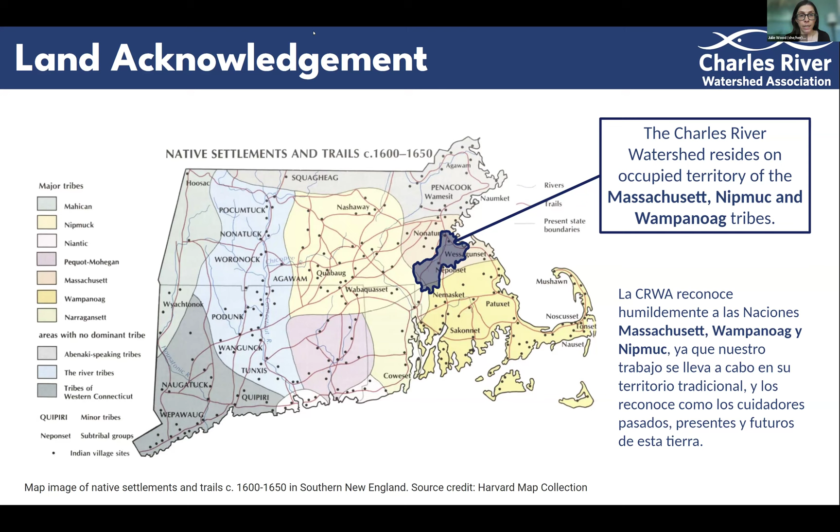A little background on the initiative we're going to talk about tonight. Starting back in 2021, working as a team with Weston and Sampson, Communities Responding to Extreme Weather, and the Charles River Climate Compact, which is a voluntary partnership of cities and towns in the watershed, we all got together and obtained funding from the state's Municipal Vulnerability Preparedness Program to develop what we call the Charles River Flood Model, or CRFM for short.

This is a computer model that simulates how water moves across the watershed. We can use this computer model to show the impacts of various storm events, so we can look at present day storm events and future storm events and see where it's going to flood and how deep that flooding will be.

We use that model not only to understand the impacts of future flooding, but also to understand possible solutions. That's where we're going to spend our time tonight.

There are 3 different areas that I already previewed in the agenda: this impact area along the main stem of the Charles between Dedham and Boston, the Barnes Memorial Park in Dedham, and an area around Adler Brook and the Needham Public Works building in Needham. Two of these are single sites, or slightly larger than single sites, essentially one site, whereas one is a larger area.

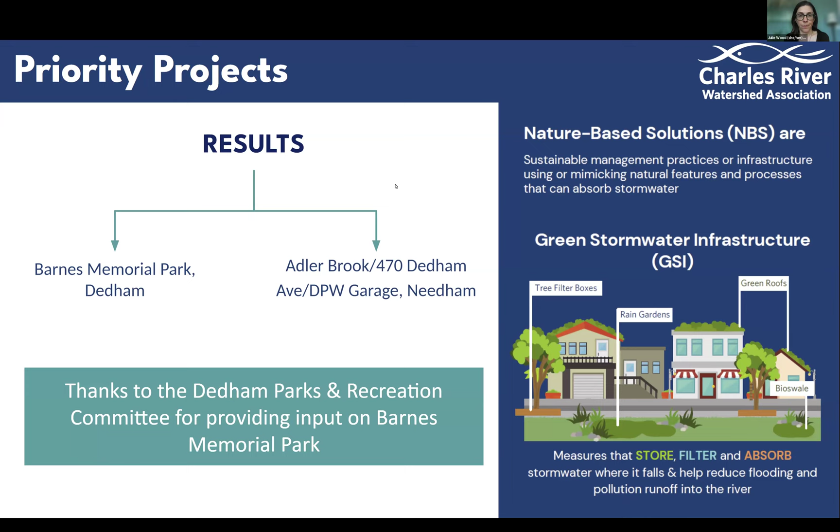You may have noticed one of the sites was a lot bigger. These are what we call our impact areas - essentially mini drainage basins, mini watersheds. The model divides the full study area up into 300 little pieces of drainage, so 300 catchments.

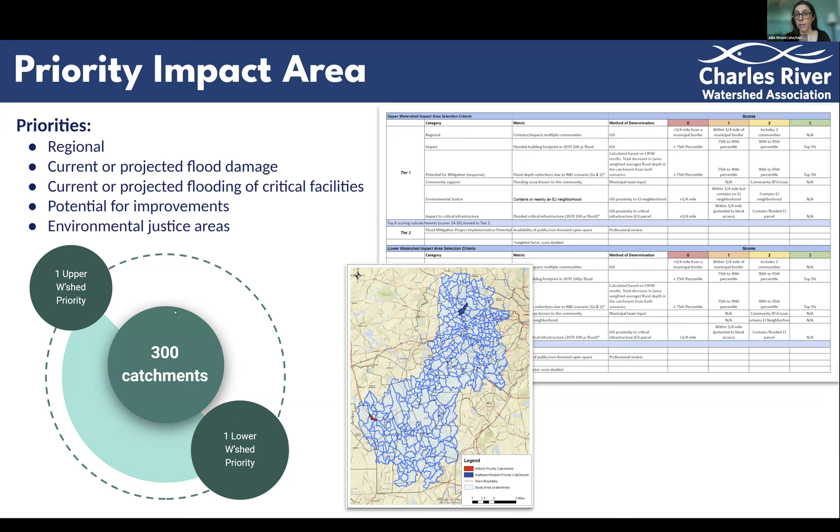The slide shows what we're looking for in prioritizing those. For these, we are looking for ones that might have cross-jurisdictional impact - maybe it includes 2 cities, 2 towns, like the one we're talking about tonight. Maybe it's right on the border and can prevent some downstream flooding. Is there current flood damage in the area? Is there projected or current flooding of critical facilities in the area? Is there potential for flood improvements, just like we're looking for with the site designs? And are there environmental justice areas that we can look to potentially invest some public investment in protecting?

All right, so that's the background. Tonight, we're going to present you for each of these sites with some concept design. That might be a very familiar term to some of you; it may be a new term to others. What is a concept design? It's an idea.

A design that gives you the general idea of what might be constructed there. It's not an engineering design with all the details of how deep something needs to be or what materials are needed. It's a very general idea of what would and could happen at a site.

It's a great time to get feedback because it's enough information to solicit input, and not far enough along that you can't take in a lot of feedback and a lot of changes.

So what do concept designs take into account? They take into account the project's goals, basic site information, and community needs and desires, which we'd want to hear from you tonight. What do they not consider?

No precise technical details of the site. We have not done soil tests, surveys, elevation surveys, precise system designs, potential ADA requirements, full coordination with all city and town departments, or maintenance needs and plans. None of those have been done at this point. That would happen in a further stage.

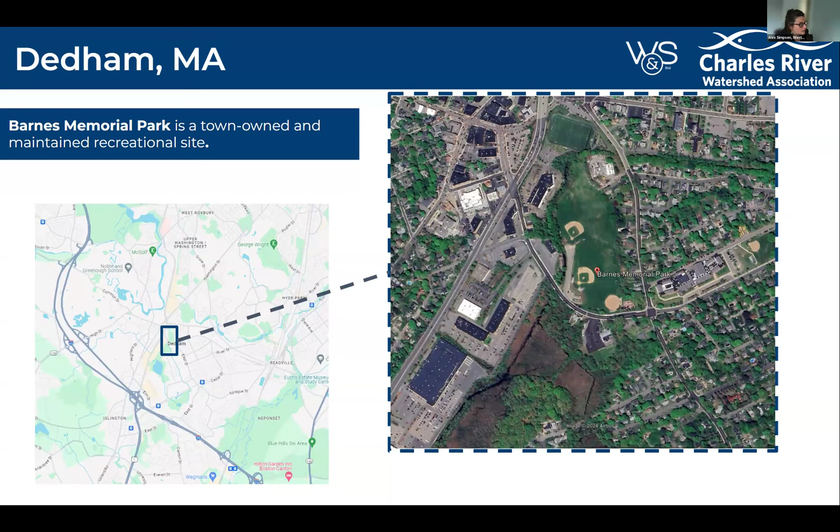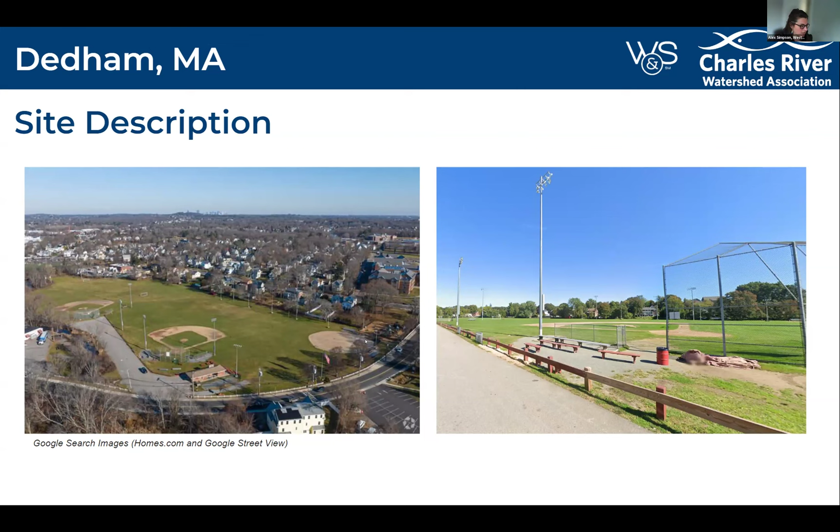As a site description, this is a well-loved, well-used recreational park site. We have an informal parking lot without any parking lines where people can go in and access the site. We have 2 formal playing fields, green space up on the north, another field back here, and a playground—a very well-loved park with lots of people using it—and then we have the concession stand here.

Now that we have the context of the site, we're going to go through the different concepts we looked at to reduce some of that anticipated flooding. These are the green infrastructure solutions Julie touched on earlier. I'll start by walking through everything we're looking at, and then as we go through the presentation we'll talk through the specific numbered concepts. I just want to touch on everything first, then go through each one, and at the end if we have questions we can talk about that. Feel free to raise your hand and pop in if you have a question—I'm happy to explain anything as we go along.

So first up, this is the site—here's our street, this is our water body, and here's the parking lot. We're looking at expanding the parking, which would be an impervious solution, but how can we treat that impervious area? We're looking at a bioretention basin, stream overflow storage, wetland restoration up here, renaturalization, and increasing the tree canopy, which is very important for urban heat island effect—we're doing that in multiple places across the site.

As Julie said, these aren't final placements, so if you want more trees, don't worry, we'd definitely be looking at that. We're also looking at an access path to increase circulation through the park and allow people to access parts of the park that aren't currently accessible to them. Finally, we're looking at a bioretention basin or a demonstration pollinator garden down at the south near the additional parking on the road.

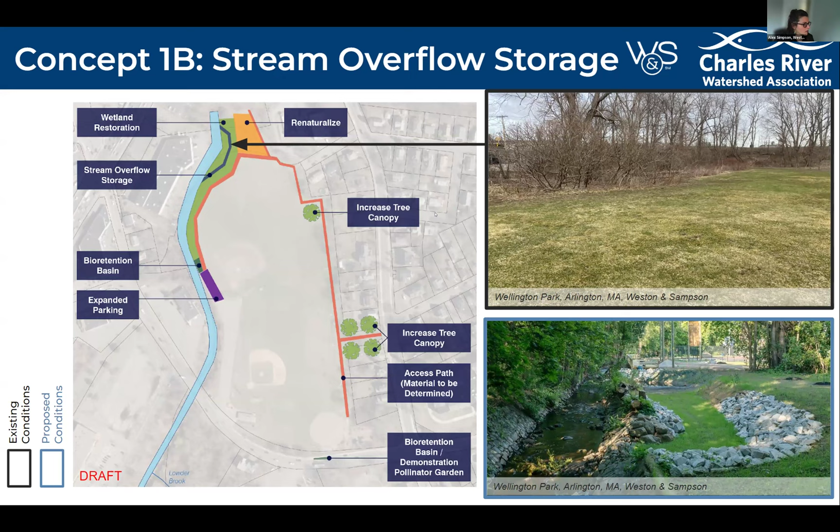For concept 2, we're looking at renaturalizing the space. In the northern part of the park, we have this wide open swath right here, and currently it's used as an access path from a higher point in the town. But other than that, this is kind of an unprescribed space that is currently not being maximized.

So it's not just trees - we're adding different topography features, increasing the amount of storage, different options there. There's just a lot of different surface treatments that can be done in a renaturalization scenario. Programming this area to be more effective at mitigating the anticipated flooding is what we're looking at doing here, without affecting the current recreational space.

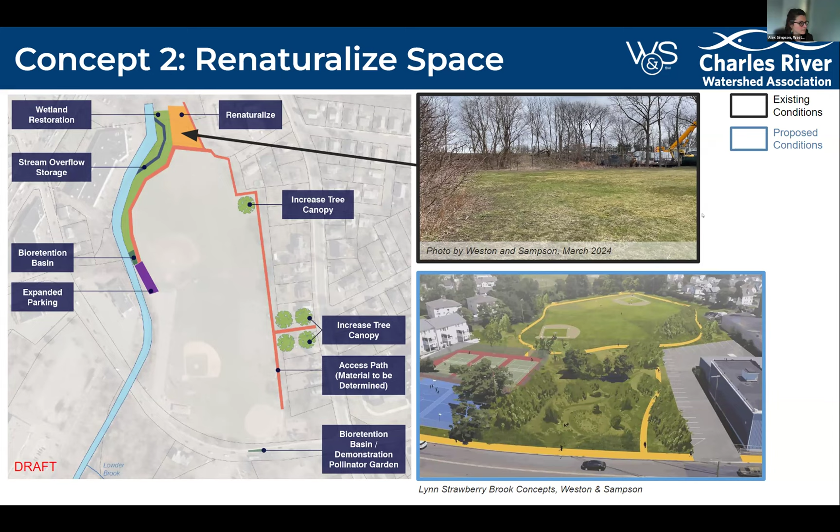Concept 3 would be looking at the bump out. This is at the southern point of the site. Right now, this is existing conditions - we have a catch basin. It's kind of at the low point of the road, and then it bumps out here, and there's room between here and an existing utility pole.

That would be a great opportunity to remove some of that impervious pavement and actually give it a pervious treatment, which a bioretention bump out could do, to capture that stormwater and infiltrate it into the ground, and add additional habitat by adding plantings with additional water uptake. So you can have a beautiful garden right next to your roadway while also increasing the amount of stormwater storage available - that's what we would like to do here.

Concept 4 is expanding the parking. We've been talking about these different pervious solutions, and this isn't a solution, but this is something that will improve the accessibility and use of the park. That's something we don't want to discount, and it's something we want to look into.

But you do have the opportunity, when you're looking at increasing the impervious area of a site, to mitigate it and actually leave it better than you started with. One way to do that is with a rain garden or different mitigation strategies that collect that stormwater you're additionally generating, infiltrating it and reducing the amount that goes back into the system.

In the existing parking lot, they already have a system that is working great and that the town really likes. So we'd be looking at replicating that system further down based on the increase, to try to even reduce the amount of runoff coming off the existing pavement as well.

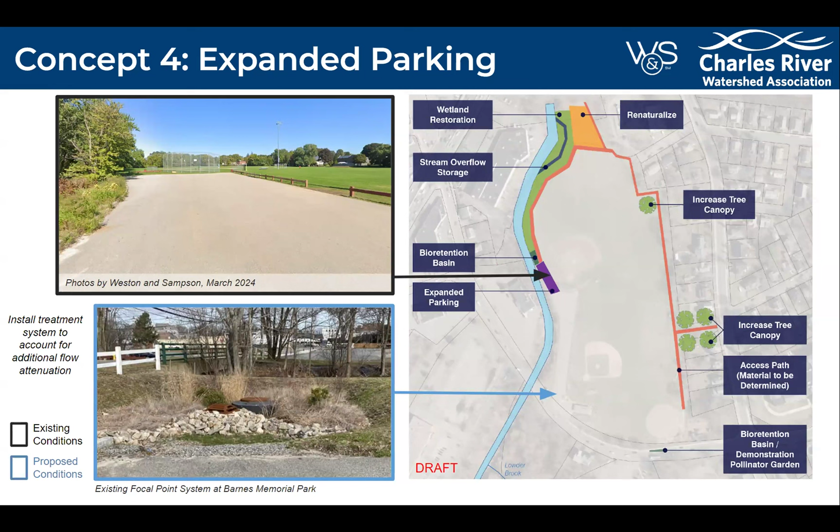As you were showing the image of the flood model, it looked like there was quite a bit of flooding anticipated south of the fields in the neighborhood area. So I was wondering if the design is incorporating or aiming to infiltrate some of that flooding through the channel restoration, or if that's a different project entirely.

As part of this specific project, we're looking at just the impacts on the field, but those downstream impacts are typically inherent to any type of project. Further modeling would be required to see what the actual impact would be. But typically...

Every water goes everywhere. Jenny, you look like you want to add something. Yeah, I was going to say, Allie, that upstream area is actually sort of a wetland system. It does encroach into the neighborhoods, but if you look at it in aerials, there is quite a bit of natural area there.

We did look at whether we could expand this project north. Unfortunately, there's really no large municipally owned parcels. It's a lot of commercial area abutting it, so it's really a separate project from our perspective. There's also culvert considerations that would need to be a piece of the puzzle under Eastern Ave. So that's the answer we have.

Okay, thank you. That's very helpful. Yeah, and just to add on, we did look over here, and this is all private, so that kind of limits some of what we can look at. Yes, Frank?

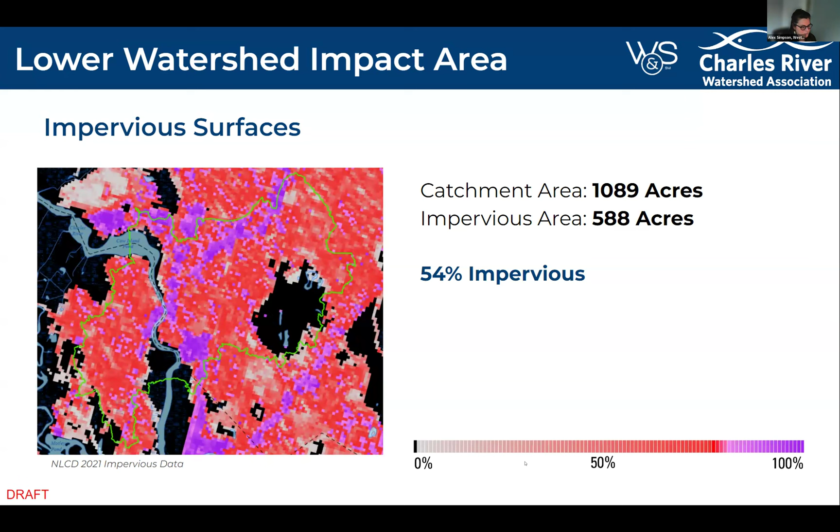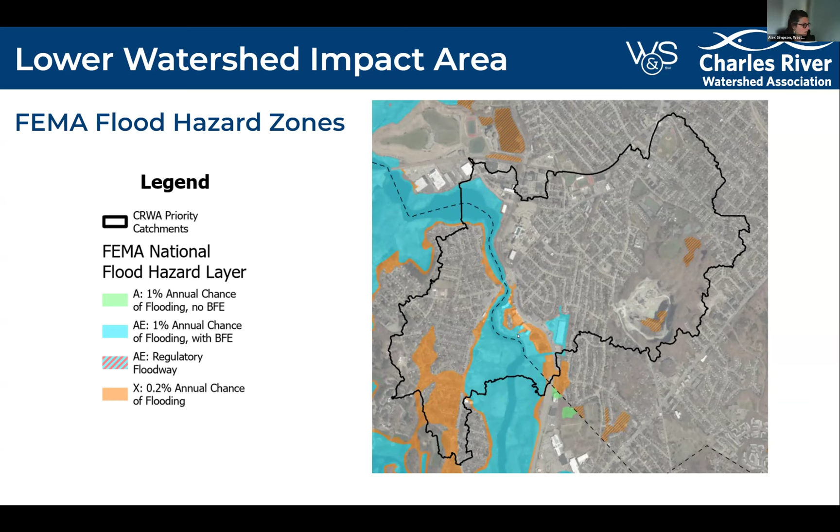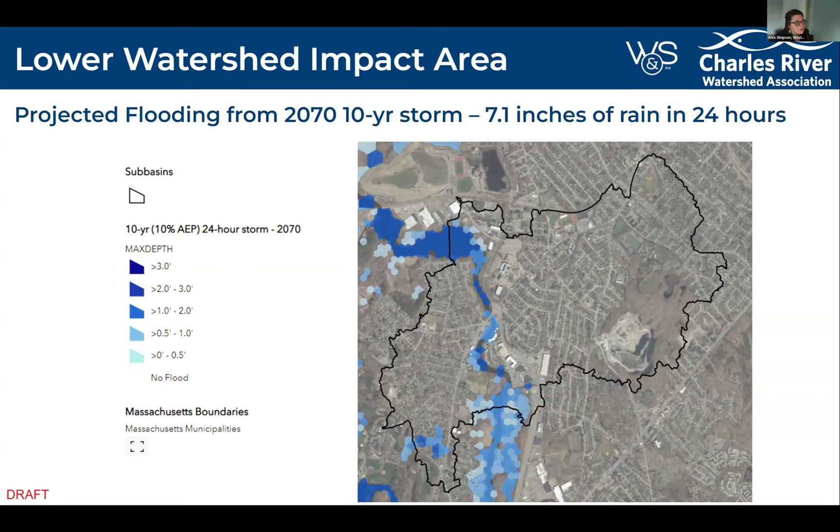As we talked about before with the modeling we've been doing, the projected flooding from the 2070 10-year storm is approximately 7.1 inches of rain in a 24-hour period, which is a lot of rain. We just talked about how over half of the area in this catchment is impervious, so it's not going into the ground in over half of this catchment. Looking at these different polygons with the depths, you can see it's pretty deep up here, and as we go this way it's not as bad down here, but we still are looking at increased flooding during this 2070 10-year storm event.

I wanted to note to everyone, this is not the most amount of flood mitigation you could do in this subcatchment. We focus on the largest opportunities and the best bang for your buck. There's a lot of residential neighborhoods with roadways, which can be very challenging to install meaningful amounts of flood storage due to limitations with utilities, parking, etc. So this isn't everything you could do, but this is a pass where we're looking at the best and biggest options to put some context to the scale of this.

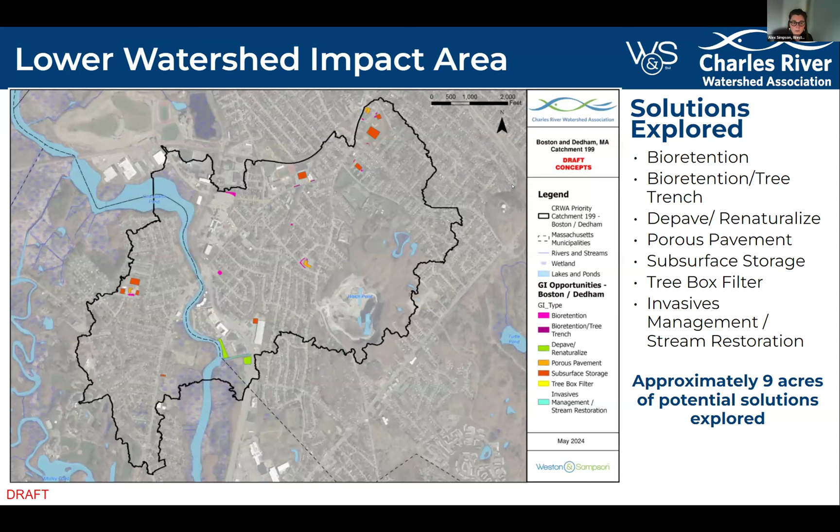Yeah, no, that's great, Jenny, so thank you for bringing that up. You can do green infrastructure almost anywhere, and if you're looking locally there are other opportunities, but like Jenny said, we're looking at these bigger opportunities to have bigger impact. So don't worry, if you don't see something you think would be great here, it doesn't mean it isn't an option.

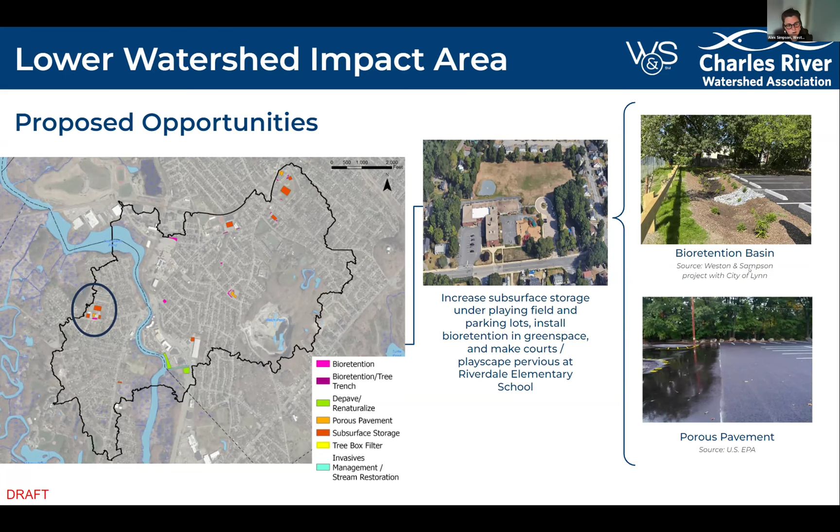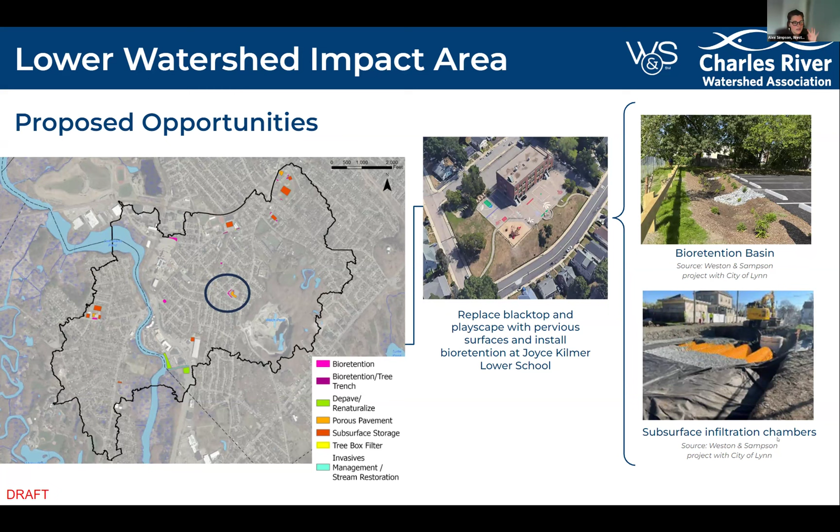And same with subsurface infiltration chambers - doing the subsurface system, you have less opportunity for educational engagement. But as Jenny said, the quantity of water that can be captured in these systems shouldn't be understated. So having a nice balance of surface treatments that students can see and be educated on, while also having these subsurface systems that can take in large swaths of water, is a really nice co-benefit to have both on a site where possible.

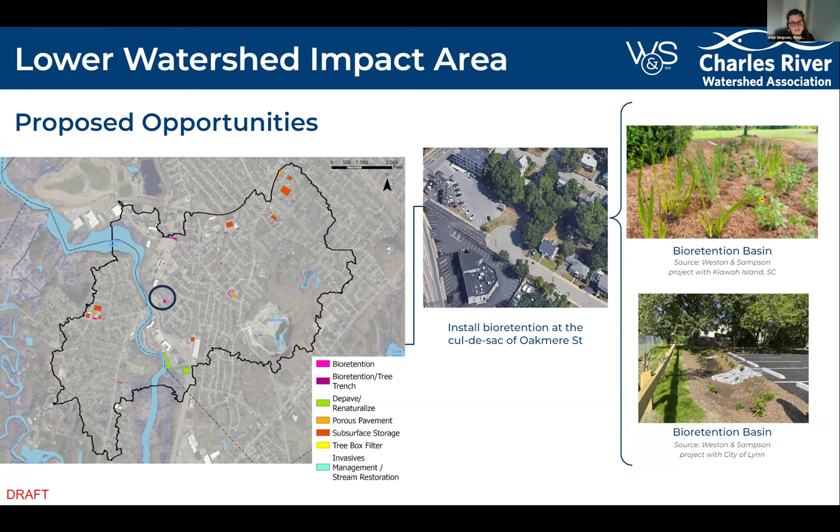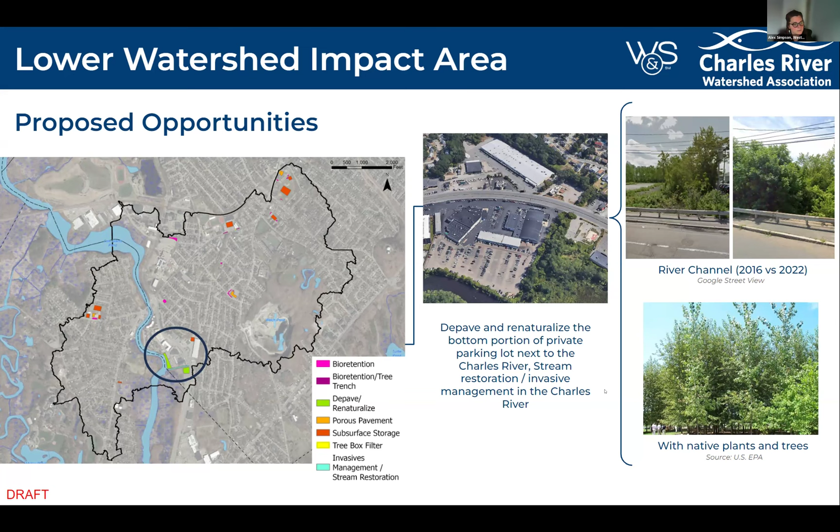And those were all of our examples—that's a very high level overview. I know I didn't spend a ton of time on each one, but I'm happy to go back and discuss. Or Jenny, if you have anything to add.

I wanted to explain a little about what's kind of cool about looking at these priority impact areas, or subcatchments. We've done watershed-wide flood modeling and looked at a variety of solutions you could employ watershed-wide—like if you reduced impervious cover by 40% across the board, what would it do to flooding now and in the future? We have those results for every catchment in the watershed. So what we're doing here is a bit of an experiment, because we did a theoretical approach, and now when we look at the actual catchment, the parcels, and the uses, and if we were to employ these solutions, how well does it compare to that theoretical approach? Those results will be shared at the public meeting, I believe, Julie. So that's one of the pieces of this exercise that's really interesting—it's taking theory to practice.

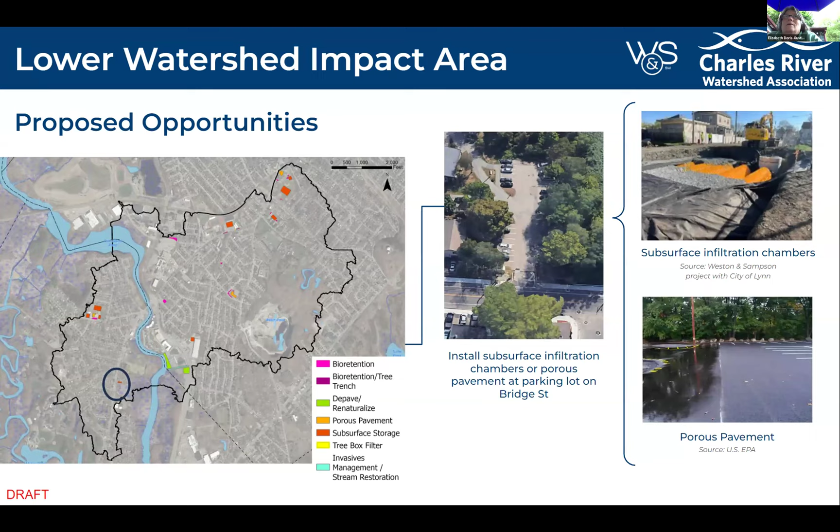Have you looked at Brook Farm? Can you put more water on Brook Farm? I know you can't do it on Gethsemane Cemetery, but I think Brook Farm is 300 acres, and most of it appears to be dry. That's West Roxbury, Baker Street. All right, we will put that in the notes. Yes, I happen to know somebody who was involved in that, so that's a really, really good area. And so much of Riverdale here is just wet, we really can't do a whole lot about it.

So we shall see. Okay, thank you all very much. I'm going to go chase my dog because she's aggravating people, and I'll talk to you all soon. Take it easy. All right, thank you. Thank you, thank you for coming.